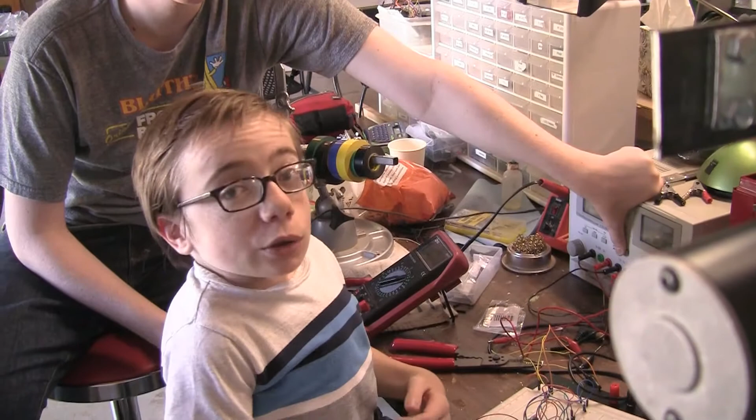Alright, so this is a test of the linear actuated elbow, so if you want to flip it on. Right now it's going in reverse, so okay, so turn it on. So essentially what's happening is the H-bridge is amplifying the 5-volt signal from here and turning it into 12 volts, which is then powering this actuator, which requires 12 volts.

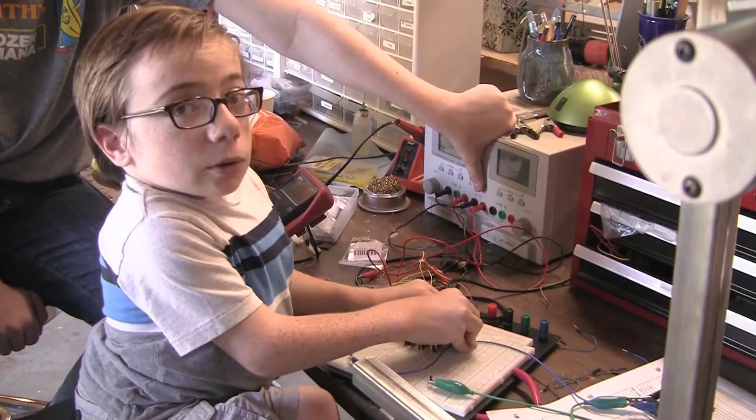So there's two inputs. If you power input 1, it moves down. If you power input 2, it moves up. So I'm going to power input 2 right now, and in the future we'll use an Arduino that will interact with the Hall effect sensor to move it up and down accordingly.

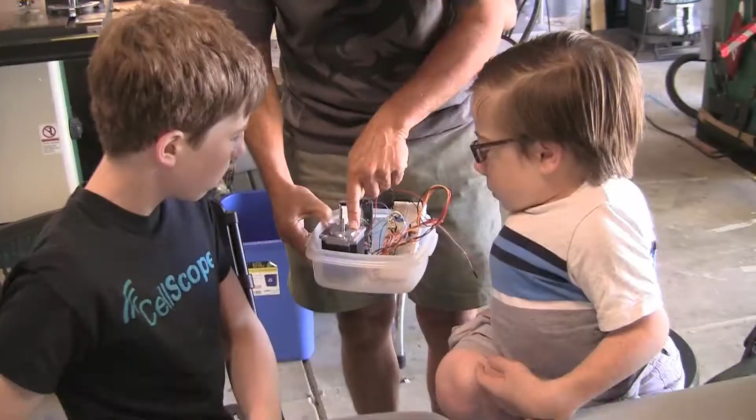Yeah. Thanks, yeah, that's good.

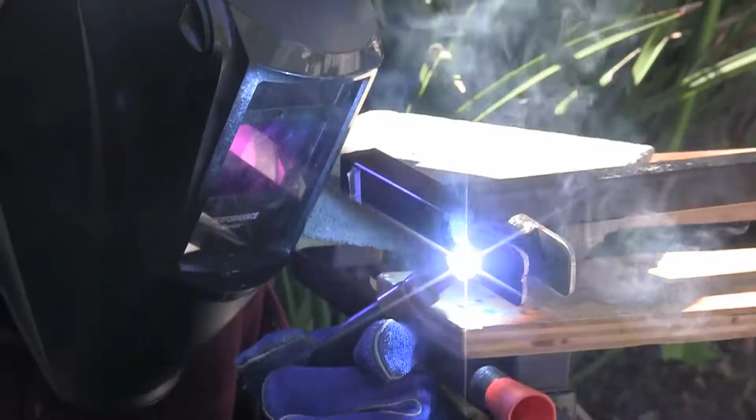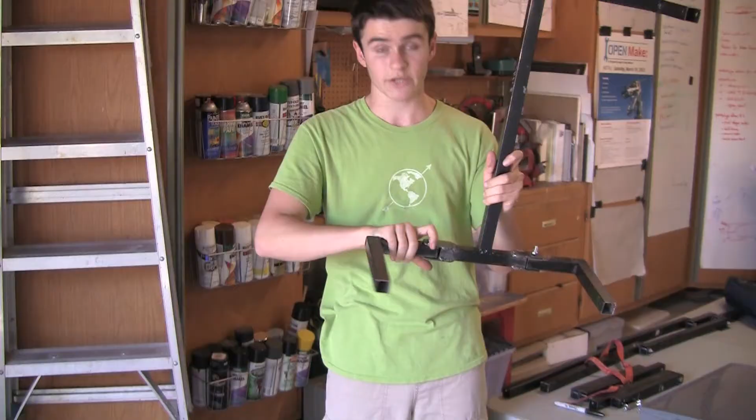So here we've got the hip rotation set up onto the unpowered armature. So we did this because we didn't want the wearer of the exoskeleton to be confined to walking in one direction at all times. So this will hopefully allow them to rotate and turn so they can change directions. So next week we'll be testing it out 100% complete, putting all the other pieces on and tying it to someone to see if it actually allows them to change directions.

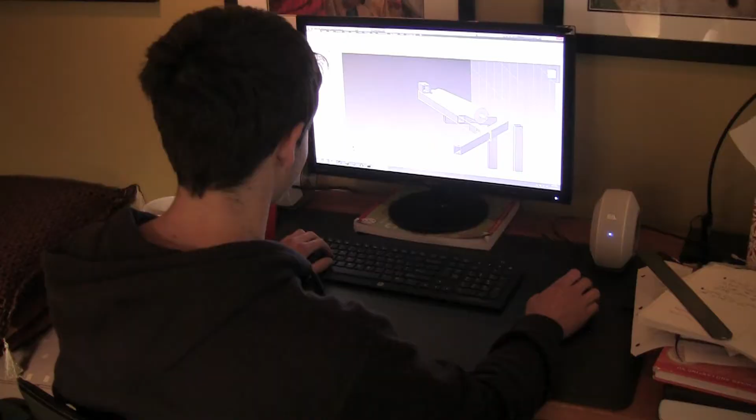In terms of the hip piece here, we've got a piston that's anchoring, hold on, there we go. A piston that's anchoring from here down to kind of the midpoint of the whole leg, so the bottom of the thigh piece. And then we're trying to figure out a good way to make the knee pretty compact.

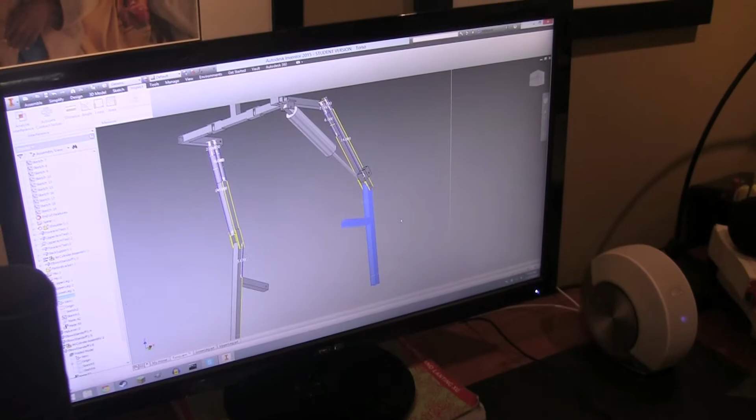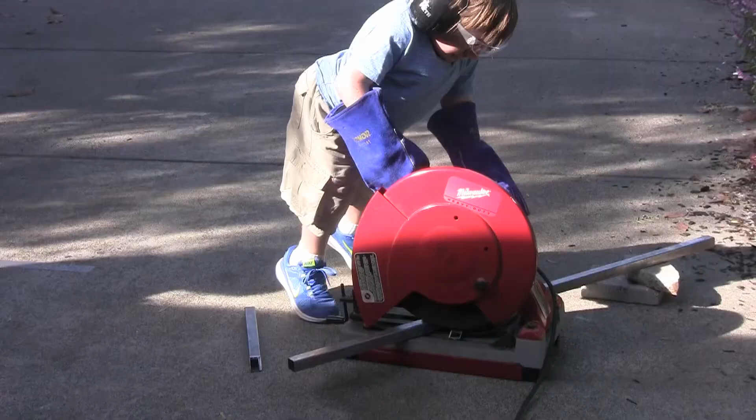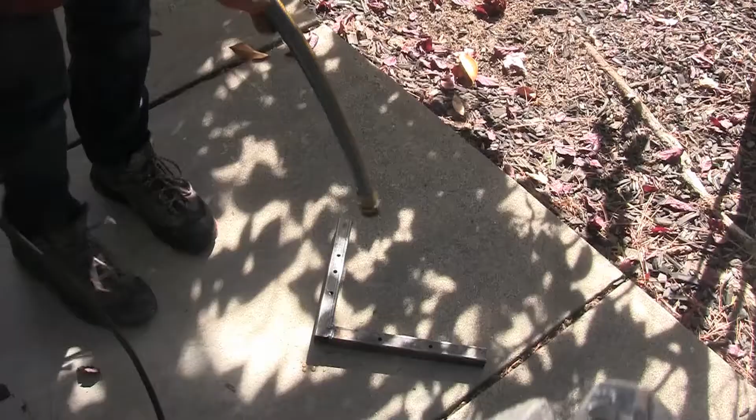Connor, what are you working on? What? Okay, so right now we're making the braces for our frame that's going to hold the exosuit, so we can display it and so we can practice in it without having the risk of falling over. These braces are going to be used to connect the entire frame together so that we can fold it up flat when we're done.

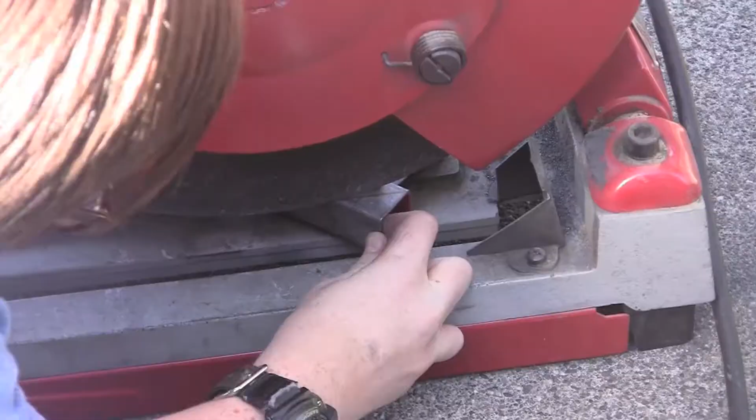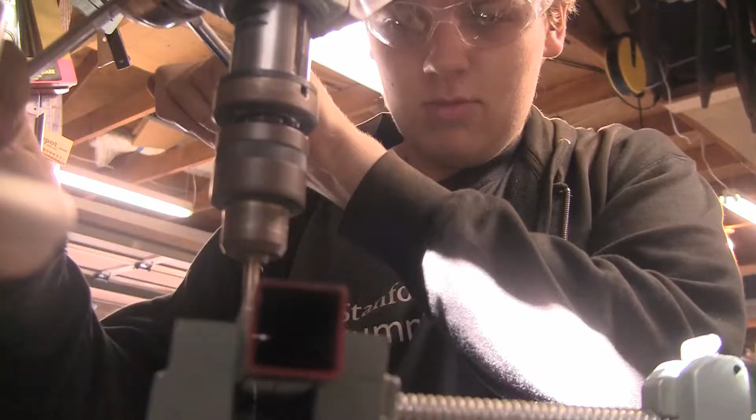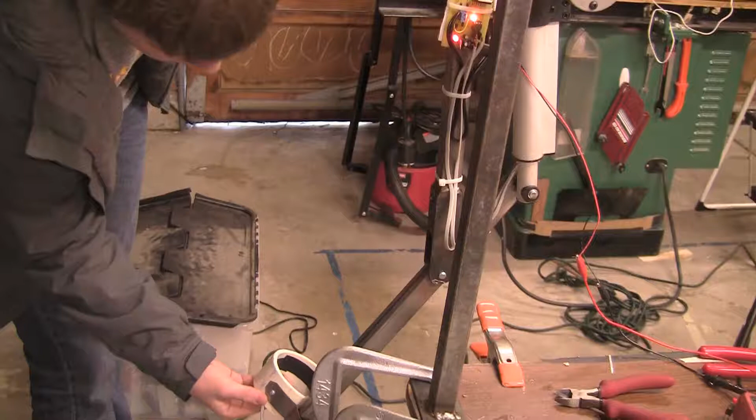This version of the arm uses an array of Hall effect sensors instead of a single Hall effect sensor like the previous prototype does. It allows us to bring a magnet close to either one of them to bring the arm up or down.

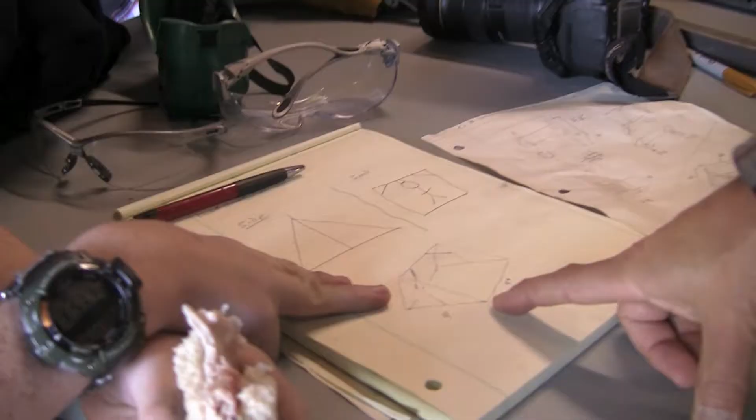Then we're talking about 300 or 400 pounds total. Because you've got, I'm fairly sure, the load plus the suit plus you.

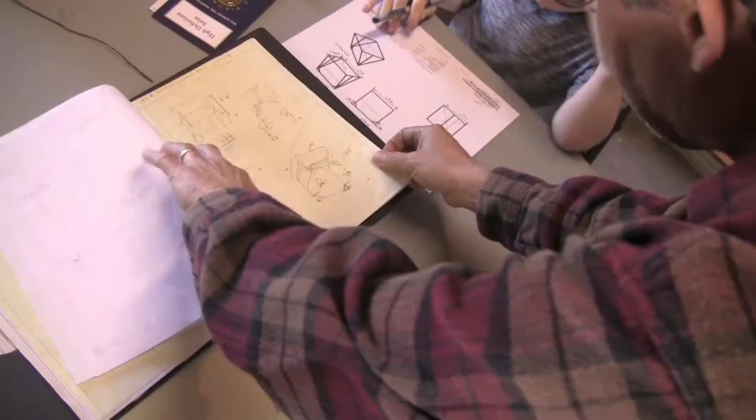Okay, so right now what we're doing is we're constructing models for a stand to support the exosuit from. So here we have a triangular base where the weight is distributed out, and then we have a more classic design, which is just a cube. Yeah, 4 feet. So 4 feet? Yeah, so 4 foot base.

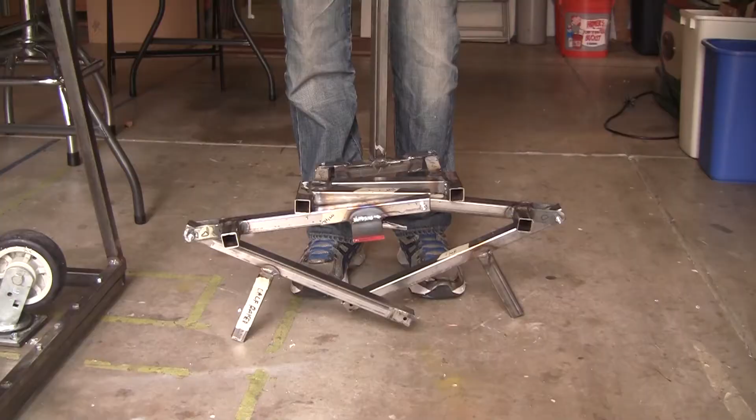You guys can all do this motion? Yeah. Okay, good. I can move my legs, yes. Conveniently folds for packing.

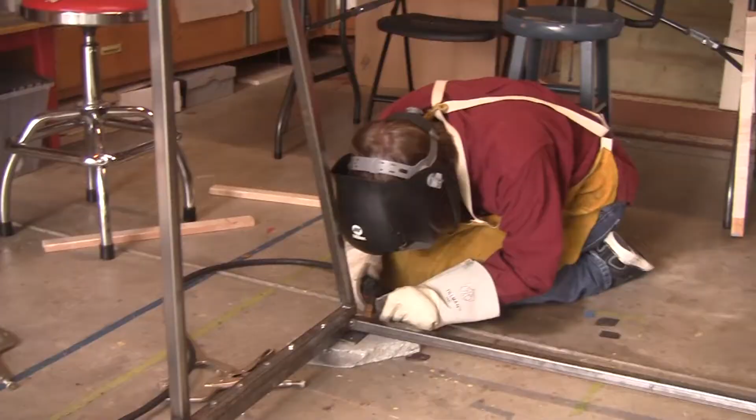Right now we're testing this valve manifold to see if our proof of concept actually works. It should shoot air out of this hole, then it should shoot it out of both holes, and then just this one, as Connor slides the potentiometer back and forth. So connect it.

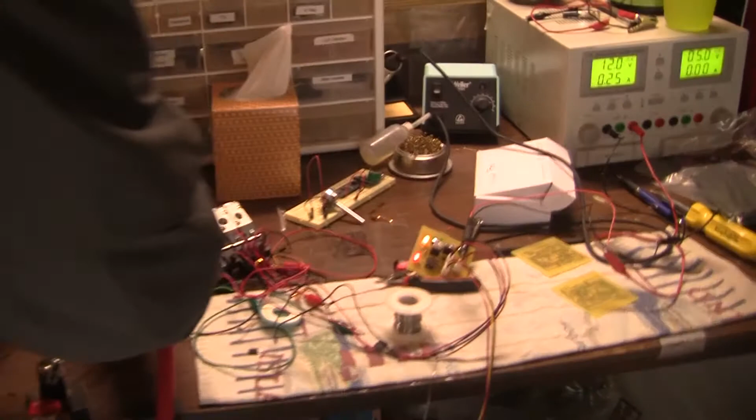Got this one. Try to get it so that both of them are

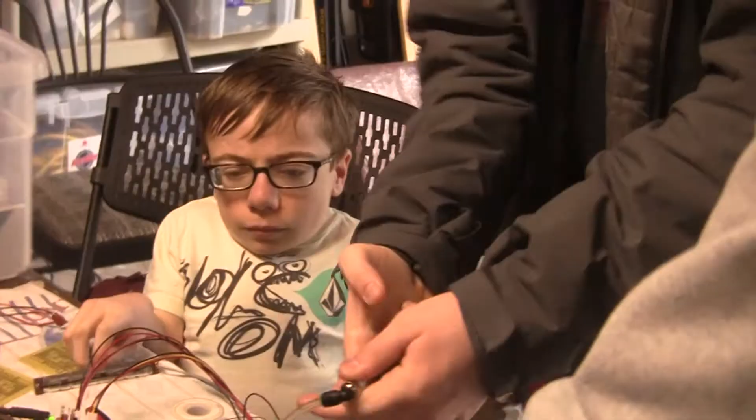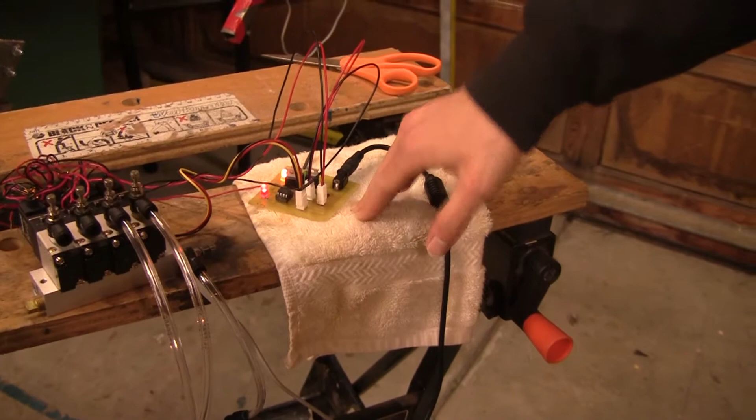So here we've got one of the joints hooked up for the leg prototype. So what's happening is the compressor is feeding in a line of air into this valve manifold, and then that opens and closes when told by this control board here, which was made by Cole and Gabriel, and this reads the output from the slide potentiometer. So when I move it back and forth, it will send the air to the designated valves like this.